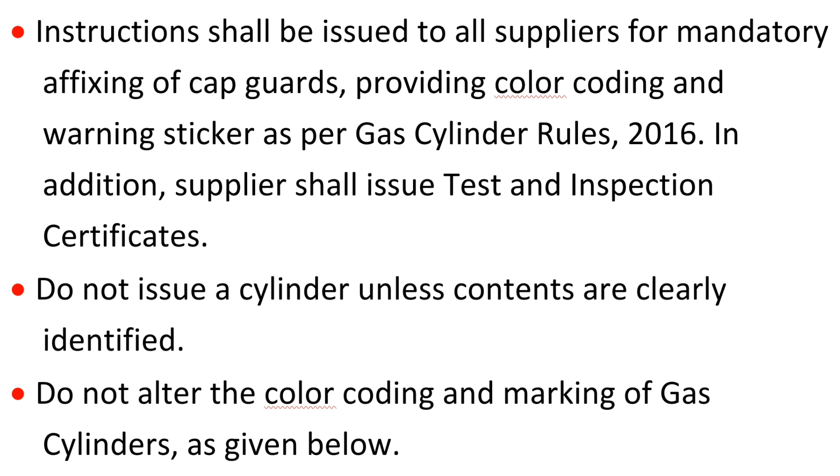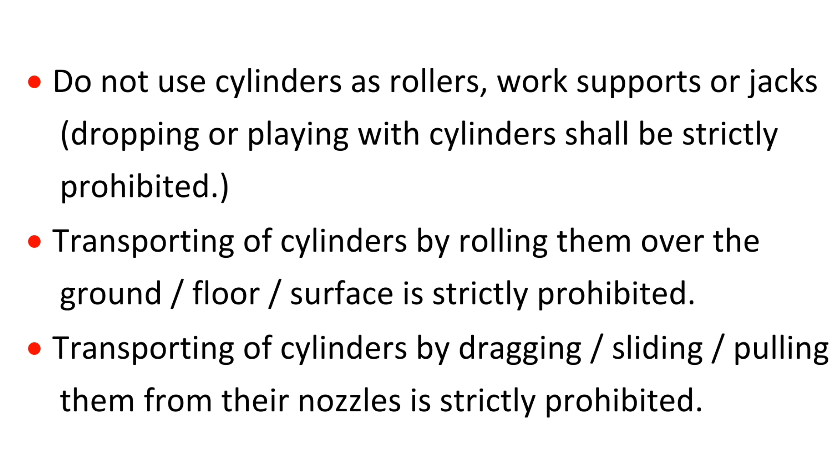Do not use cylinders as rollers, work supports or jacks. Dropping or playing with cylinders shall be strictly prohibited. Transporting of cylinders by rolling them over the ground floor surface is strictly prohibited. Transporting of cylinders by dragging, sliding or pulling them from their nozzles is strictly prohibited.

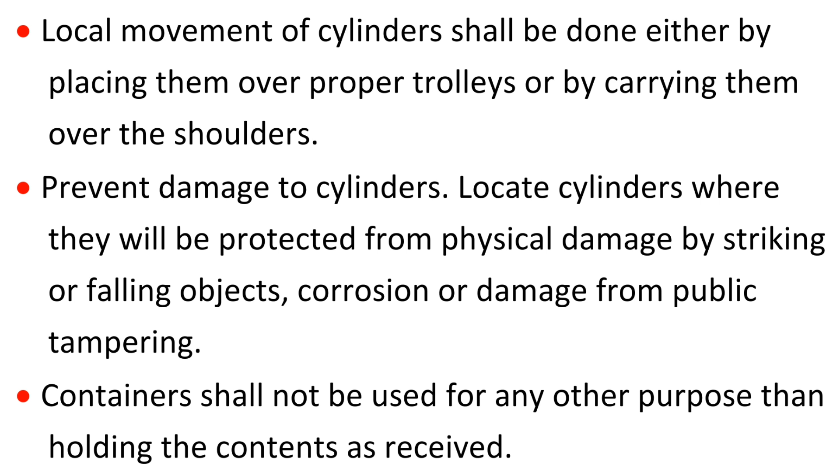Local movement of cylinders shall be done either by placing them over proper trolleys or by carrying them over the shoulders. Prevent damage to cylinders. Locate cylinders where they will be protected from physical damage by striking or falling objects, corrosion, or damage from public tampering. Containers shall not be used for any purpose other than holding the contents as received.

Damaged or leaking cylinders must be reported immediately for proper disposal. Cylinders shall not be picked up by pulling the cap. Any leaking cylinder must be handled properly. Magnets shall not be used for lifting cylinders.

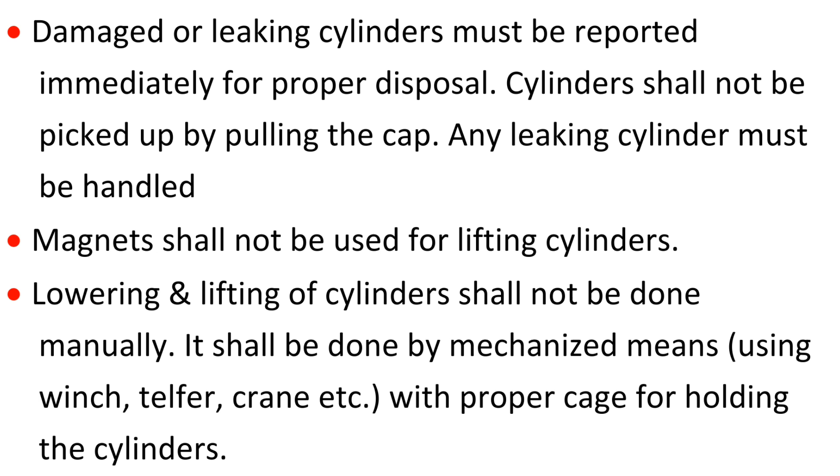Lowering and lifting of cylinders shall not be done manually. It shall be done by mechanized means using winch, telfer, crane, etc., with a proper cage for holding the cylinders. Where appropriate lifting attachments have not been provided on the cylinder container, suitable cradles or platforms to hold the containers shall be used for lifting.

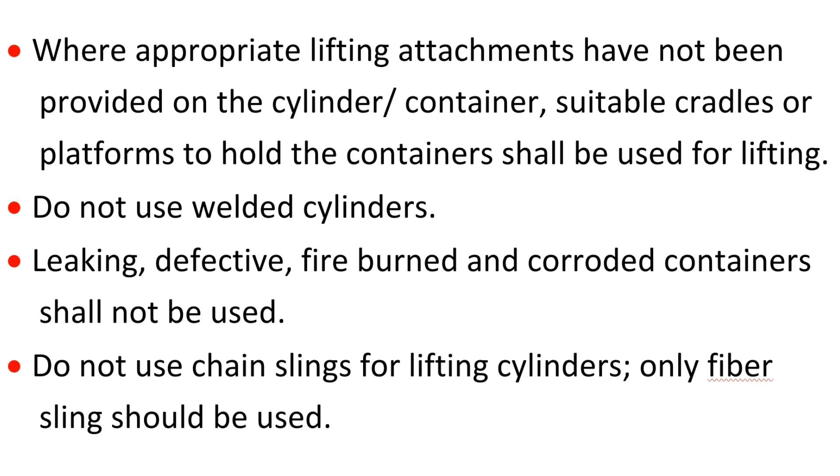Do not use welded cylinders. Leaking, defective, fire-burned and corroded containers shall not be used. Do not use chain slings for lifting cylinders; only fiber slings should be used. Do not allow cylinders to come in contact with electrical apparatus or live wires. Do not lay gas cylinders on wet soil.

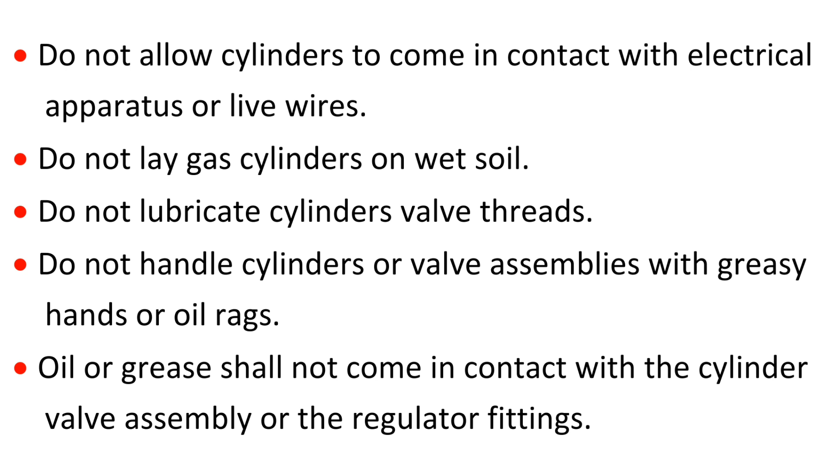Do not lubricate cylinder valve threads. Do not handle cylinders or valve assemblies with greasy hands or oil rags. Oil or grease shall not come in contact with the cylinder valve assembly or the regulator fittings. Use a red hose for acetylene and other fuel gases and a black-green hose for oxygen. Never interchange hoses. Train workmen to handle and store cylinders properly, and in case of any problem, it has

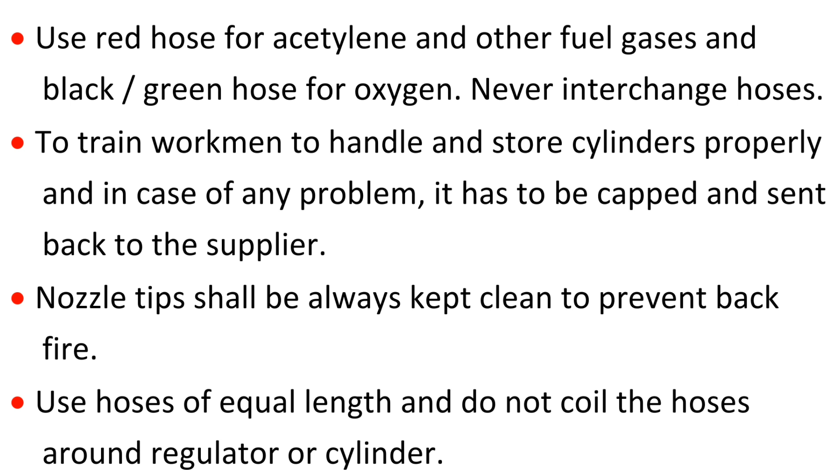to be capped and sent back to the supplier. Nozzle tips shall be always kept clean to prevent backfire. Use hoses of equal length and do not coil the hoses around the regulator or cylinder. Ensure that regulator pressure control valve is relieved, example closed, before attaching to tanks.

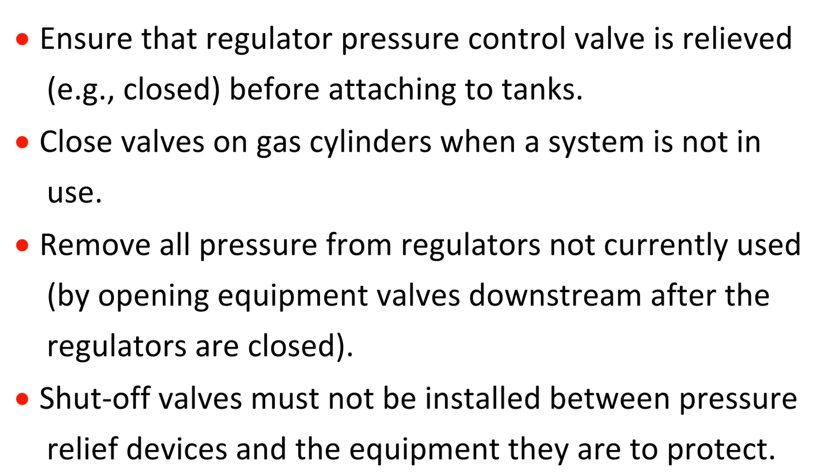Close valves on gas cylinders when a system is not in use. Remove all pressure from regulators not currently used, by opening equipment valves downstream after the regulators are closed. Shut-off valves must not be installed between pressure relief devices and the equipment they are to protect. Use pressure relief valves in downstream lines to prevent high pressure buildup in the event that a regulator valve does

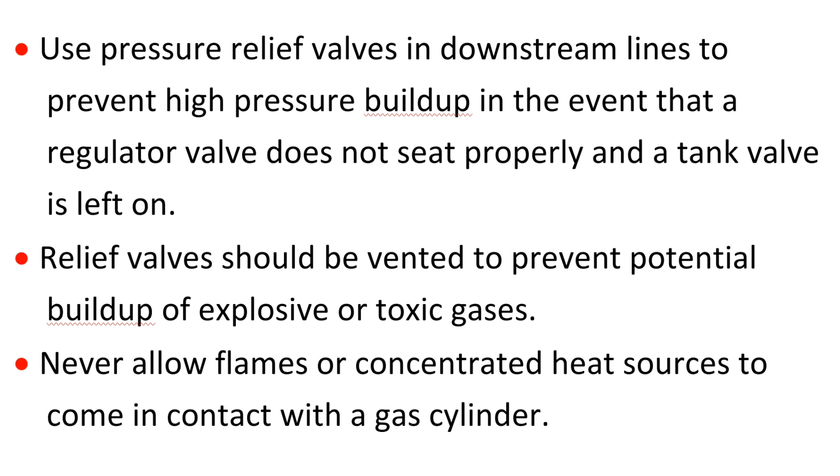not seat properly and a tank valve is left on. Relief valves should be vented to prevent potential buildup of explosive or toxic gases. Never allow flames or concentrated heat sources to come in contact with a gas cylinder. Never allow a gas cylinder to become part of an electrical circuit.

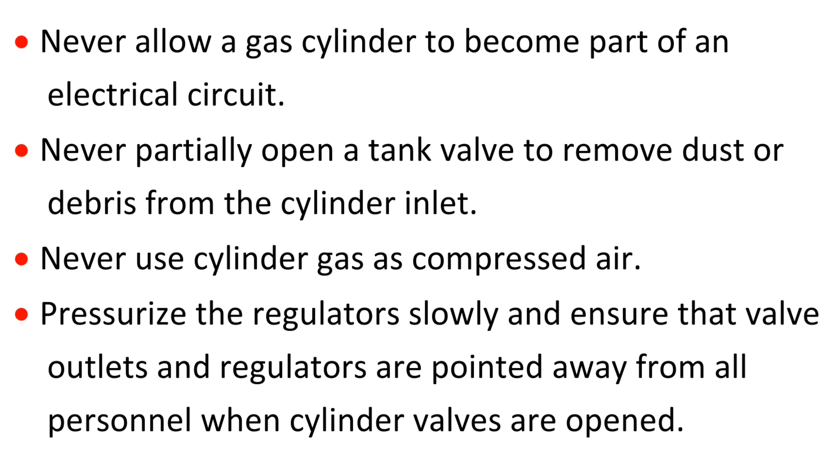Never partially open a tank valve to remove dust or debris from the cylinder inlet. Never use cylinder gas as compressed air. Pressurize the regulators slowly and ensure that valve outlets and regulators are pointed away from all personnel when cylinder valves are opened. Cylinders which require a wrench to open the main valve shall have the wrench left in place on

the cylinder valve while it is open. Use adequately sized wrenches, 12-inch long, to minimize ergonomic stress when turning tight tank valves. Never apply excessive force when trying to open the valves. Cylinders with stuck valves should be returned to suppliers to have valves repaired.

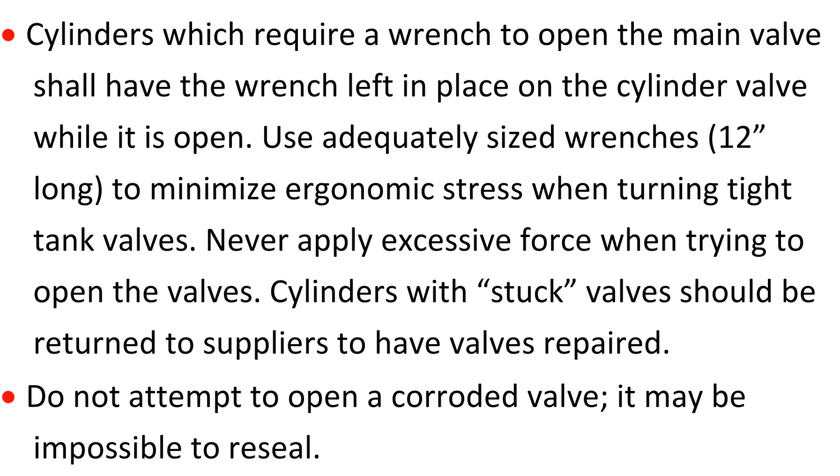Do not attempt to open a corroded valve; it may be impossible to reseal. Valves should only be opened to the point where gas can flow into the system at the necessary pressure. This will allow for quicker shut-off in the event of a failure or emergency.

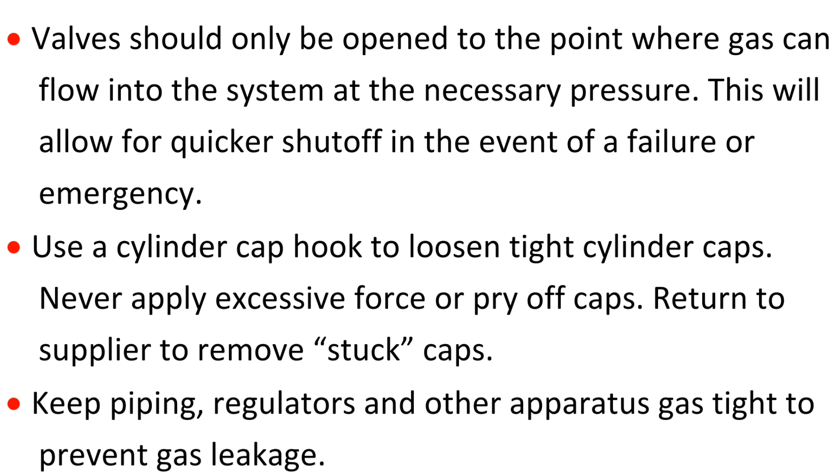Use a cylinder cap hook to loosen tight cylinder caps. Never apply excessive force or pry off caps. Return to the supplier to remove stuck caps. Keep piping, regulators, and other apparatus gas tight to prevent gas leakage. Confirm gas tightness by using compatible leak test solutions, example soap and water, or leak test instruments.

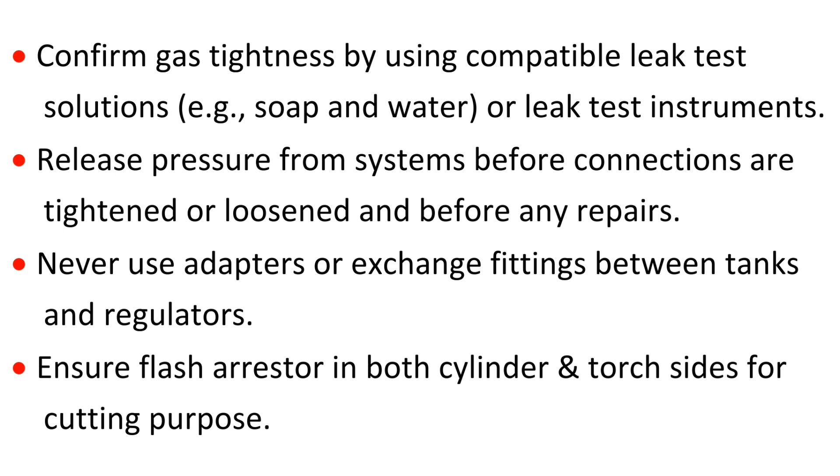Release pressure from systems before connections are tightened or loosened and before any repairs. Never use adapters or exchange fittings between tanks and regulators. Ensure flash arrestors are on both cylinder and torch sides for cutting purposes. Gas isolation shall not be done by kinking or twisting the flexible hose. In case this is done, then the hose shall not be reused.

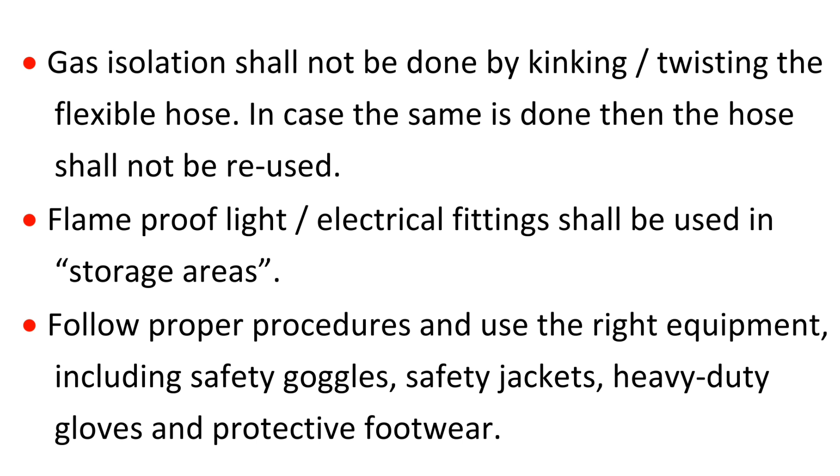Flame-proof light electrical fittings shall be used in storage areas. Follow proper procedures and use the right equipment, including safety goggles, safety jackets, heavy-duty gloves, and protective footwear. Avoid placing cylinders on uneven surfaces, as the cylinder may fall, causing injury or damage. Ensure the area has adequate lighting. Never use gas cylinders for the purpose for which they are not intended.